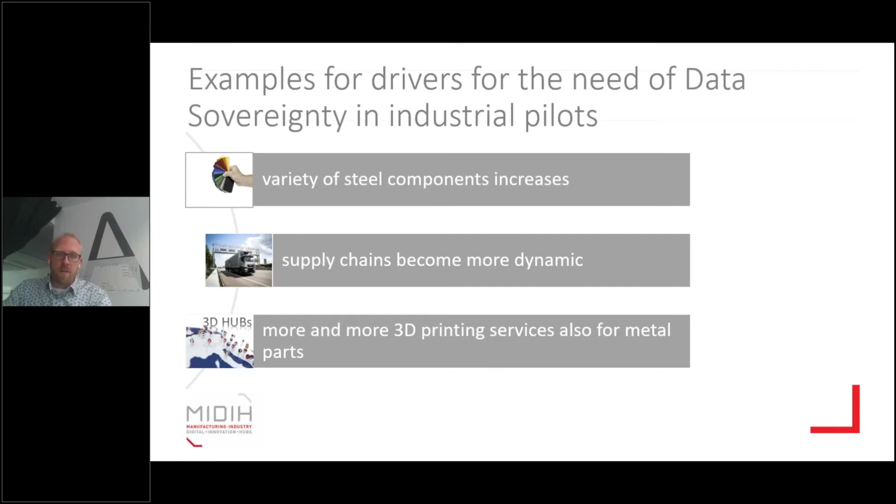And this is something that is special about the steel supply chain, is that more and more 3D printing services are available also for metal parts. And they are reliable, they are usable, and they open a new playing field. And it's a little bit innovative, and things change here a little bit because these supply chains are more and more dynamic. But again, this applies to every other manufacturing scenario as well. So please go to the next slide.

We had one example in our experimentation, and this was the valve box. You can see on the left side. It's a valve box for submarines, and as you can see, it's a box. But if you produce it or engineer it with additive manufacturing, you can explore completely new geometries. And you see it in the middle. It looks a little bit differently, a little bit more organic, and it's more expensive, but it's more reliable. And so in submarines, it's a good idea to use those valve boxes produced with additive manufacturing.

But those submarines are typically produced all over the world. The one you can see on the right is produced for Singapore by ThyssenKrupp. So what you can do with additive manufacturing, you can produce the part where it's needed. That reduces the amount of logistics, the travel routes that you have for the logistics of your part.

You can produce it everywhere, but at the same time, the data is becoming more and more important because there is a lot of engineering know-how to make such a valve box into such an organic shaped thing, and you have to protect this IP. And this IP is completely in the data. If you give away the data, the description, the CAD file of such a part, every printer can print it again and again and again without paying any license fee.

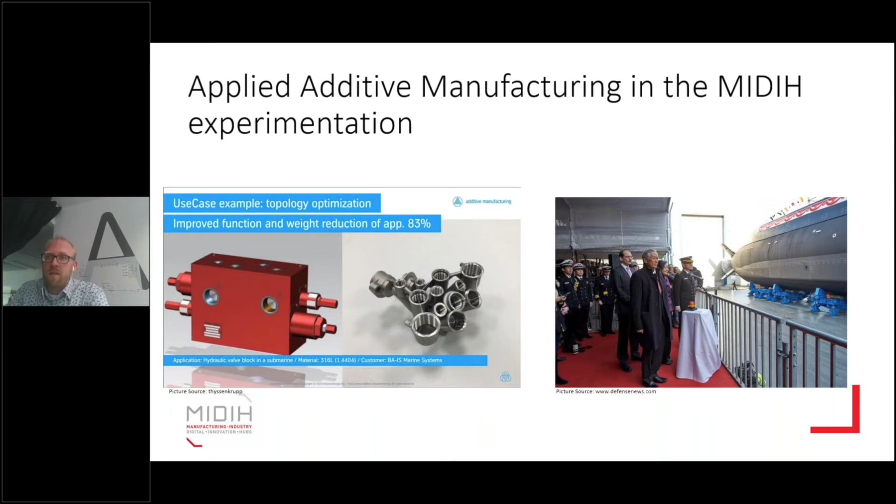The idea of IDS is not to provide the new huge platform for everything, the single cloud system that stores every data set and provides access control to this. But we are aware that there are a lot of systems that are being combined into an ecosystem, here an additive manufacturing ecosystem, including a logistics system for the supply chain of additive manufacturing. And the idea of the IDS is to connect all those different platforms that are in use and required or necessary to fulfill this business.

The IDS connects all those different platforms and all those different systems in the printing hubs, in non-destructive testing, in post-processing like deburring or painting. They connect them, and we can put data usage constraints on top of the data. So, for example, if the engineering company, in this case ThyssenKrupp, provides the data set, the CAD file that has to be printed, to a printing hub, they can put a usage policy, a usage constraint on top of this data and state you may only print it once or 3 times, whatever.

And the same also applies to a logistics company that can say, I can transfer part A from company A to company B in this time and for this amount of money, and you may see it, but you may not show this data to other logistics companies to make a benchmark or something like this. And this is what we can do. We can bring together all those different systems and combine them into one huge ecosystem that is more dynamic and more flexible.

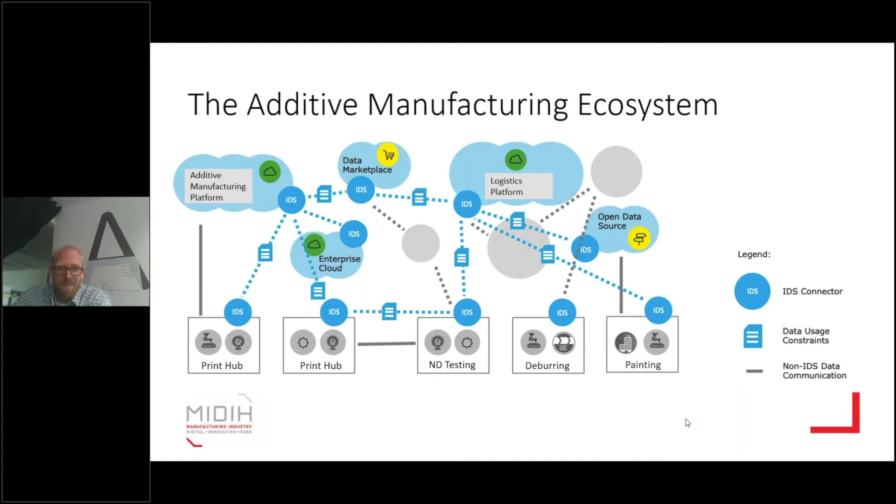On the next slide, please, there is a little bit more of a technical view on what we've done so far. In IDS, we make use of the so-called IDS connector. One important artifact that is a trustworthy runtime, a platform inside a company, for example, that enables the data exchange.

And the IDS connectors in the different companies: here on the right side you can see the print hub, on the left side you can see the engineering part, the ThyssenKrupp side. Both systems exchange the data, the CAD files, if necessary.

For example, in the first stage of such a process, when the companies are asked to make a price or a timing, create an offer, when and how to create this part, the CAD file gets provided to the print hub. They can see it and create an offer on top of this. And then there is a selection phase. We have a number of different offerings, and then there is a selection process.

We select one of those offers, and then all the other companies, all the other print hubs are not enabled anymore to see the files, and more files with more details are provided to the print hub that was selected. This is supported by a blockchain node, by a blockchain system based on smart contracts to provide access or no access to those different files.

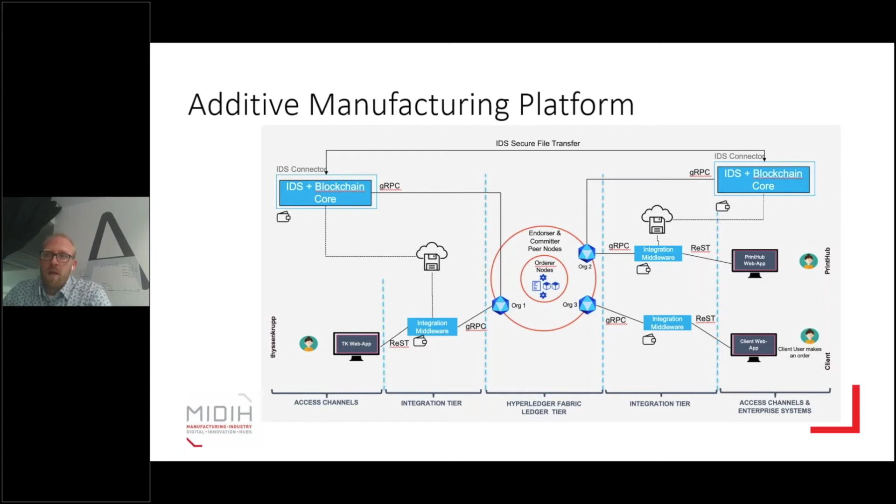In this scenario, on the lower right side, you can see the client, the customer. The customer is in this scenario not yet connected to the IDS, but in a further stage, we will also connect the customer, the client, and also others. And I would like to show you how this works on the next slide, exactly.

So this is the basic idea behind the information flow and the material flow in such an ecosystem. There is a customer that maybe just has a sketch or an idea what he needs. For example, I need a valve box for a submarine. And of course, for this scenario, we need systems, ecosystem enabling, findability, accessibility of data, interoperability, and usability of the data assets.

And then there is something like a marketplace that is also built in other projects where you can compose different kinds of services. I need engineering services from this company. I need consultancy services from another company. I need a printing hub. I need material supply. You can compose your service as a customer. Which different participants or which different suppliers or partners do you need?

And then, of course, the first and one of the important steps is the engineering part. So there is a sketch of a part, and an engineering company with a lot of knowledge in additive manufacturing engineering creates a digital representation based on the requirements that were stated. And in this CAD file, as already said, there is a lot of intellectual property inside, and it has to be protected because it can be copied as often as you want.

Some of you remember those Napster times when music was copied as often as wanted, and this was a huge problem for the music industry in those days. Today, we have the same things, but only in manufacturing industries.

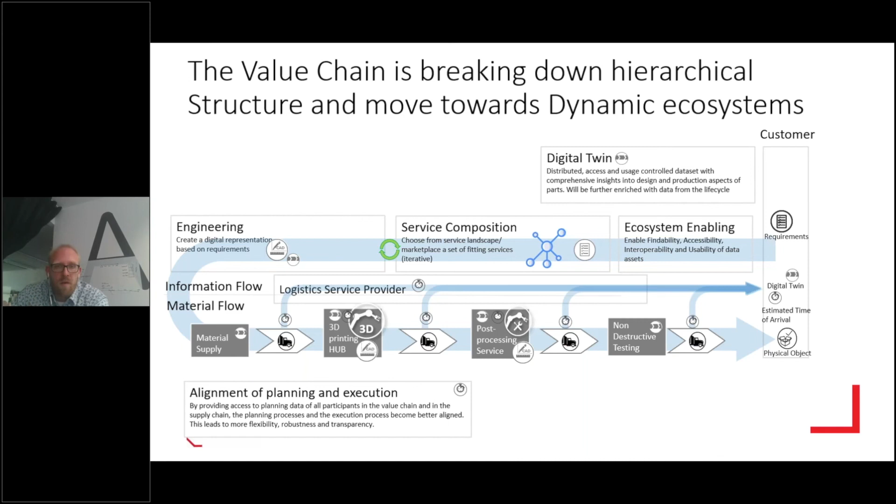And these are real cool new business models that are enabled by data and by the availability, the sharing of data. This is a use case that we are working on in MIDIH, together with ThyssenKrupp and the MIDIH partners. But there are other use cases that we can connect now to this use case to enlarge this ecosystem. And if we move to the next slide, I have another example, the Smart Factory Web. The Smart Factory Web is an IIC testbed that is now also using IDS technology and the asset administration shell from the platform Industry 4.0. So it can be easily connected to this ecosystem.

And here the question is, I have a factory and I need more production lines because my factory is running with full capacity, with customer orders, or one of my machines failed. So how can I scale out? And I have a web of different companies, different factories that provide similar services. I can easily scale out to another factory. Ask my competitor, please produce these parts for my customers. And if my factory is not running under full capacity, I can also produce other parts for my competitors.

So technically, we can support this, but this will only work if we can put usage policies, usage conditions on top of the data. Because I don't want to share my IP. My IP has to be protected. My customer data has to be protected. But I want to make use of this web. And we have integrated the Smart Factory Web within IDS. Please go to the next slide.

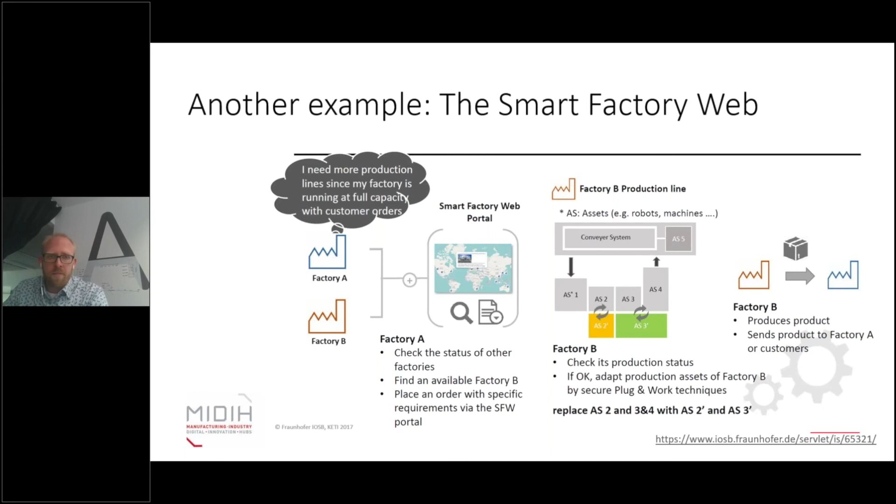So what basically happens there is that there is an asset registration process where every asset and machine, for example a 3D printer, is registered in the Smart Factory Web, and it can be searched. You can search via the capabilities of the system, what kind of system you need, and then you can negotiate with a factory network. Say, okay, I want to produce this part, but what is the price? What is the delivery time? What quantity do you need? And what quality do you need? And so on and so forth. And then you can do the ordering, operate things, manufacture it, and monitor what happens. And all those steps are completely based on data and make use of the machines behind.

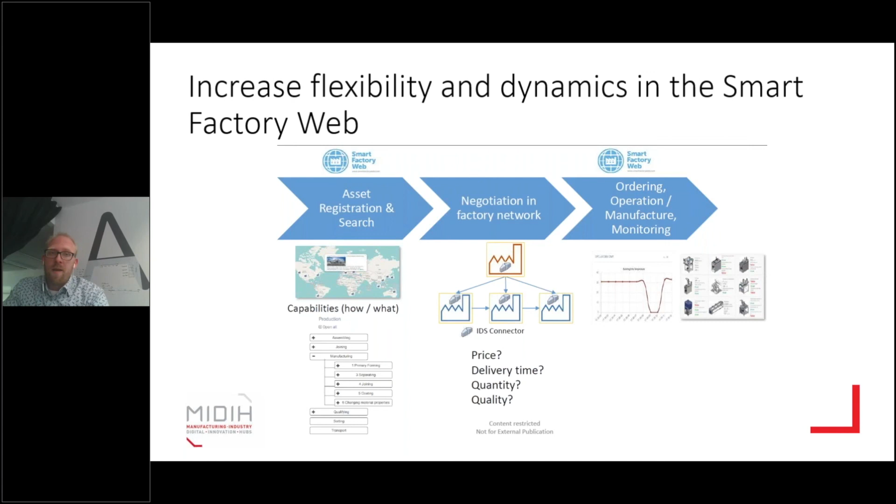And then my final slide, you can see that one important thing here is that we have to cross different borders, company borders. We are not inside one security domain anymore, but there is a collaboration of different companies, of different systems, and technically speaking, of different security domains. And the IDS connector bridges between those different security domains, between an ERP system in one company, the manufacturing company that produces something, and the Smart Factory Web connector on top of this.

And of course, we have to integrate different kinds of standards here. IDS is for the data exchange, for data sharing, crossing the security domains. Of course, we have to integrate standards like the asset administration shell from the platform Industry 4.0 or OPC-UA, for example. And we are combining this to really create a manufacturing ecosystem where new cool business models can be executed there.

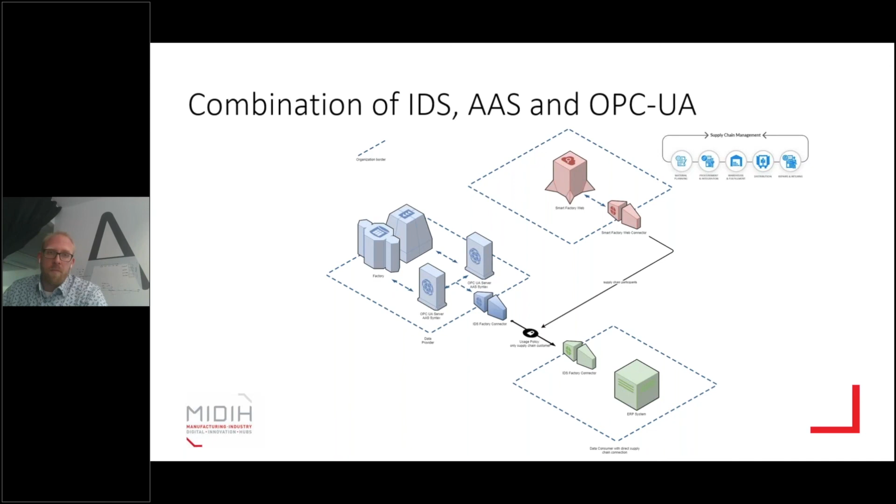Yeah. That was my part, and I'm happy to give the word to the next one. And I'm not sure who it is. I think it's Martin and Liz M, if I'm not mistaken.